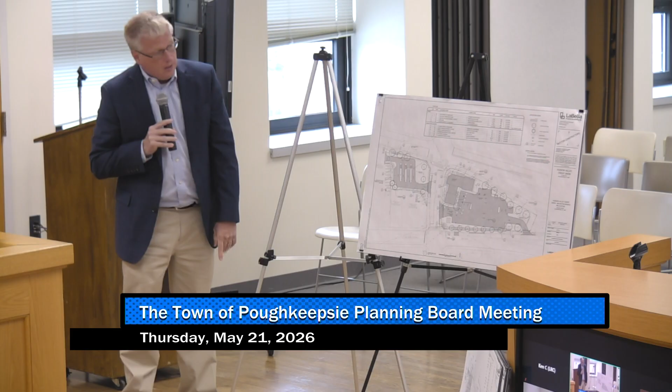That is kind of the large overview of where the changes are and where we've been with the plans. Frank, would you mind stepping up here real quick before we turn it over to Mauri, just to go over some of the traffic items as it pertains to that, and then I'll let Brandon from Mauri Architects give an update on the building.

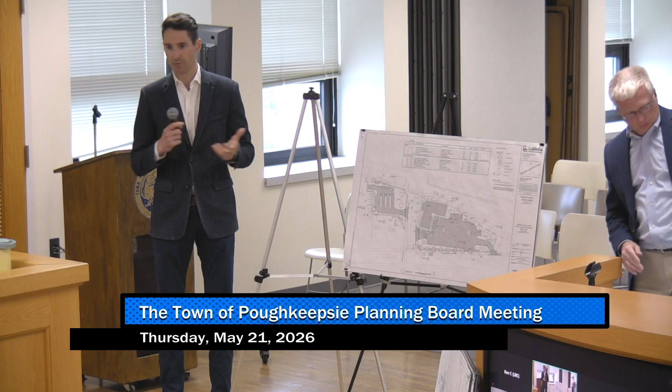Good evening, everyone. Frank Felicciotto with Labella Associates, licensed professional engineer, over 20 years of experience in traffic engineering, transportation planning, and site design. I've been working on this project alongside Roger. First time I'm before you this evening, but what Roger said is accurate.

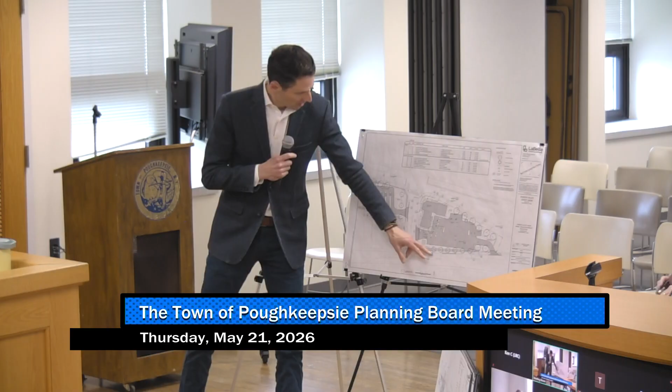We have feedback that came from DOT today. We will not be able to propose a driveway on Route 44. So initially it was a left in and a left out, then it became just a left out, and now it will not be any driveway. Their main reasoning is that they're viewing the leftmost lane as a ramp, and according to their policy, they do not permit driveways on ramps.

The loss of that driveway can be recuperated by a right out onto Fairmount and then a subsequent right onto Main Street. So from a traffic volume perspective, we're not putting the people that would be using that driveway with no place to go. They can make the right and then a right. It's a little bit less convenient, but it's possible and practical.

We've reviewed JMC's recent memorandum. It had a few comments that I believe were going to be very easily addressed. One of the comments that I think is going to take a little bit more work on our end is the comment about the left turns out onto Fairmount.

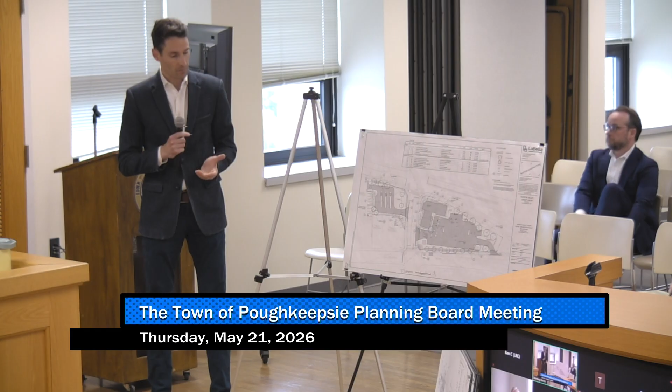Unlike the proposed driveway on 44 that the DOT will not permit, not having a left out onto Fairmount leaves people trying to get back into Arlington towards Vassar with no other option except a circuitous movement—either a right turn followed by a left turn onto Main Street and then some sort of double-backing to get down to Fairmount. The left out onto Fairmount is really the most direct and simplest way to achieve that movement. Without that turn, it's not possible to directly get there.

We've improved the driveway location from where it is now—it's an existing condition, as you know. We've looked at sight distance; there's adequate stopping sight distance for that movement. We're talking about approximately 7 to 8 left turn movements in the worst case peak hour, so it's not a significant amount of traffic because it's just the traffic heading back southbound on Fairmount. But it is an important movement to capture that neighborhood activity that needs to get back in that direction.

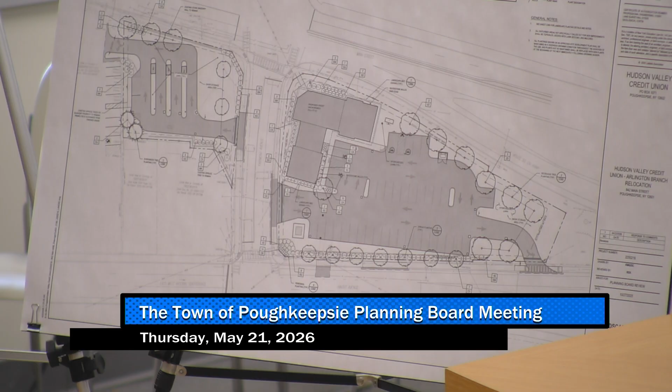So we're prepared to provide a formal response back to JMC with further justification for that movement in the coming days. But our position is, we're able to lose that driveway on 44—we have a plan for that with the redundancy that a right and another right provides. But unfortunately, having to give up lefts out onto Fairmount leaves this site with very, very little access, and already it's a difficult site from an access standpoint. So that's something we believe we can work through, and we'll be providing that documentation in the coming days.

Anything else in particular, Roger, that you had on your mind? No, I think that's great. Okay, and we can let Brandon just do a quick update on the building, and then we can open it back up to the board for feedback.

Thank you. I think Brandon's going to use some technology, whereas I'm still a little old school, so I'll turn it over to you. Here you go—actually, you know what, I'm going to use this. You mind if I use this so I can operate the mouse? Good evening, Brandon Petrella with Mauri Architects. I'm just going to share my screen.

Okay. Is that up for everybody? Appears like it is. Yeah, okay.

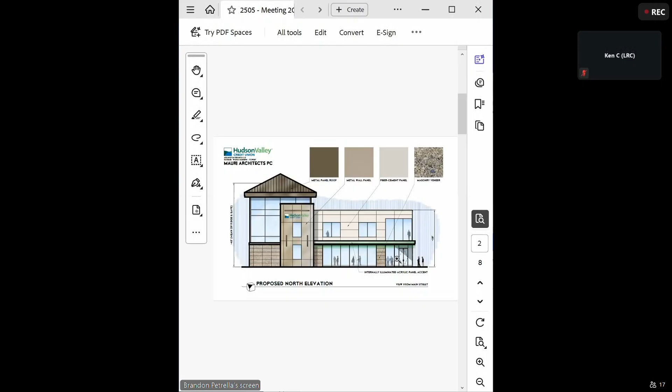We turn the corner at Fairmont, which would be our next slide. The materiality continues through, and now we have sort of an emphasis on the corner of Fairmont and Main.

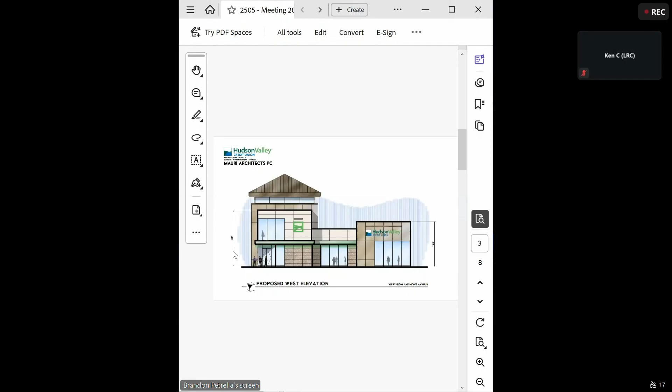As we continue downward towards Haight Avenue, we're transitioning from a two-story building down to sort of a one-story building with an accent at the very end. There's some accent metal panels at that location—the corner of the arterial Haight and Fairmont. We're accentuating that corner by popping up the roof just a tiny bit, but we're still maintaining the large glass spans so we have those views into the retail banking spaces.

As we turn that corner, this elevation is a little misleading because you're seeing a lot of the two-story in the background. It seems a lot more present, but really what you're going to get is a little more of that one-story at that corner, and it's all set back a little bit—that's all purposeful for this one story.

It's because as you move further down Fairmont towards Haight, it becomes a little more residential, so we're bringing the scale of the building down as we progress towards that side of the site. Materiality continues, but a lot of this two-story you're seeing is far back—that's out by Main Street.

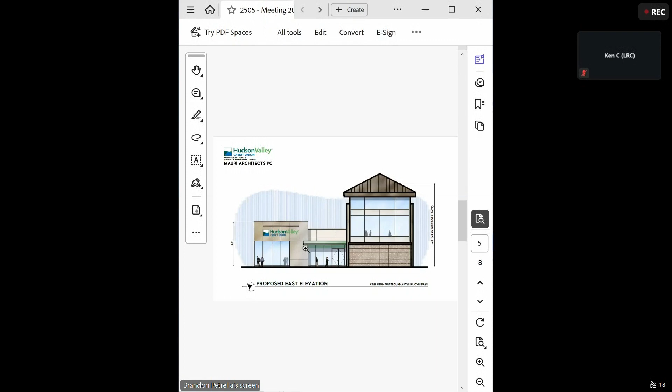Finally, what you're looking at is the parking area, or if you were coming from the overpass looking straight back, the most prominent feature here would be the two-story tower. We have a clerestory space in that as well—there's a multi-purpose room in that space, so we're using that high ceiling and volume purposely. You're also seeing the entrance there, again the green accent canopy tucked inside the inside corner, and that's to the rear.

Finally, I just want to go back—this is the entrance to the town center. We're starting to get into town, coming down 44 under the overpass, and this is our existing view. The buildings aren't up against the streetscape like they are further into the town center—they're set back a little, they're two-story. What this building's going to do is emphasize the entrance to Poughkeepsie with that tower.

That tower is going to be up against the road front. The credit union was kind of born in Poughkeepsie as part of IBM, and I think it's fitting that it can help define coming into Poughkeepsie proper with this building. I think the features of the building are moving the architecture and the business itself forward with the ITMs, but at the same time it's calling homage to all the materials you guys are familiar with from every credit union in Poughkeepsie.

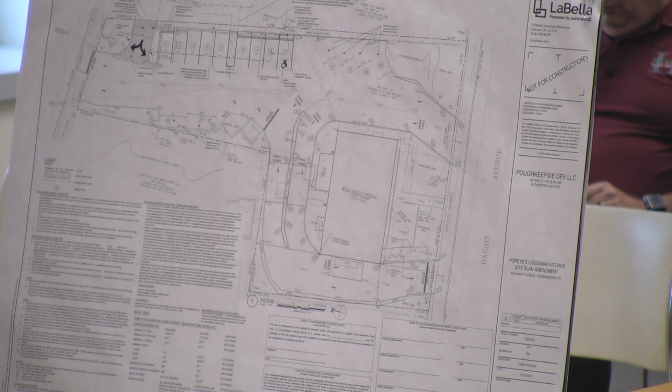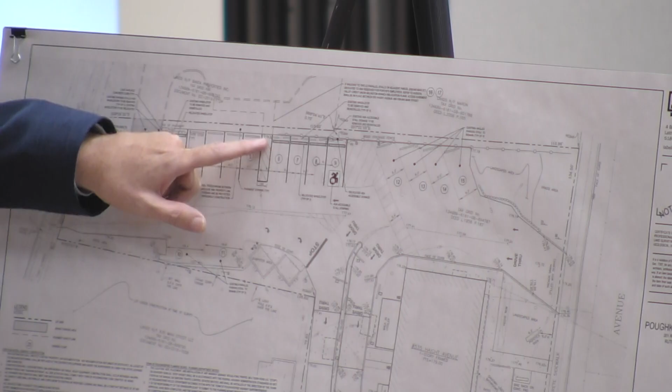That's since been reversed, so essentially the change in the site plan remains the same, just that we spun the direction. The two parking spaces right up here where this access is, the credit union is going to provide those on their property with a maintenance access agreement and parking agreement between the two. We've restriped these parking spaces and provided a sidewalk on the credit union site to bring those people over to this side. That is really the limit of the site plan changes from last time.

Instead of the arrows going in, they've turned to come out. The balance of the site plan remains the same. So that's all I have on this one.

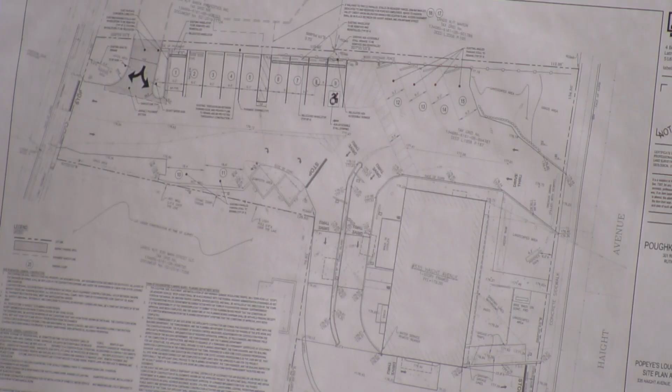Thank you, Kristen. It is on for a public hearing this evening, the first public hearing. It is on for SEQR review, for an unlisted action subject to coordinated review. Again, planning board declared their intent to serve as lead agency in December. No objections have been received. It is on for an amended site plan review.

My comments are pretty minimal on this particular application, but as it relates to the Hudson Valley Credit Union application and the ITM parcel, the traffic engineer and I were talking about the egress, and the Arlington Fire Department also, given their frequent trips on Main Street—Popeyes is a busy restaurant with a dual drive-through, and both are heavily used. Some of the traffic proposed to exit the ITM parcel has the option to go south to Haight or north to Main Street. The traffic going south through the parcel has to queue behind those in the drive-through, so we wanted to take a closer look at that. That's just another conversation to have between the applicant and staff.

And it is on for public hearing. Staff are recommending that you open the public hearing, adjourn the public hearing, and defer action with comments. Again, happy to facilitate any meetings as necessary.

Okay, thank you. Andy, engineering, did you have anything? Yeah, we really don't have much. We're just asking for the easement agreement for the use of the access.

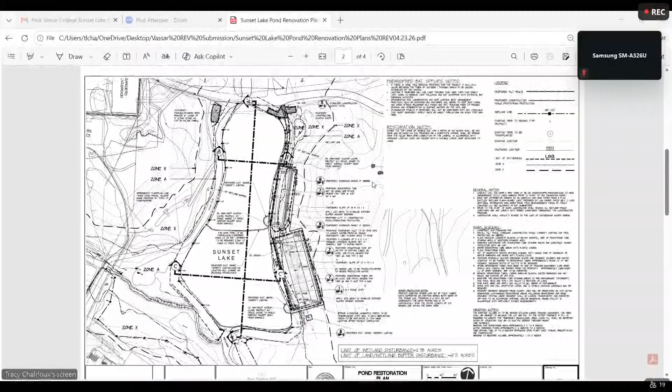And we did receive comments from various town departments, and those have been addressed. We've been trying to keep up to date with all of those comments.

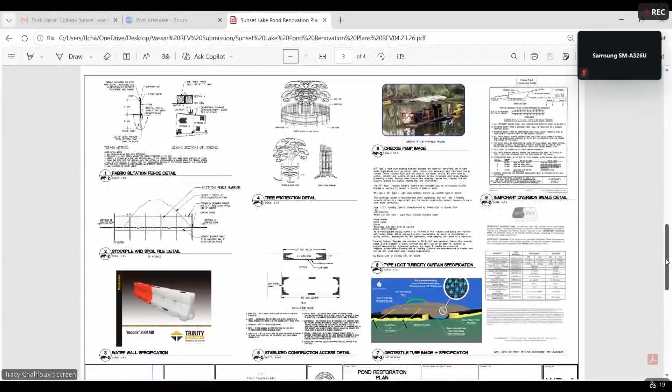There are sediment and erosion control details shown in this set, and also pond dredging sections shown, cross-sections taken from 3 different locations of the pond.

There's approximately 2 feet of sediment within the pond to be removed, and the intention is just to restore it to its original depth. So we're not deepening it, we're just going back to what it was essentially.

I'd like to emphasize that any disturbance is temporary. So after those dewatering tubes have been removed, the hillside would be regraded to the pre-construction topography, and it would be seeded again as lawn.

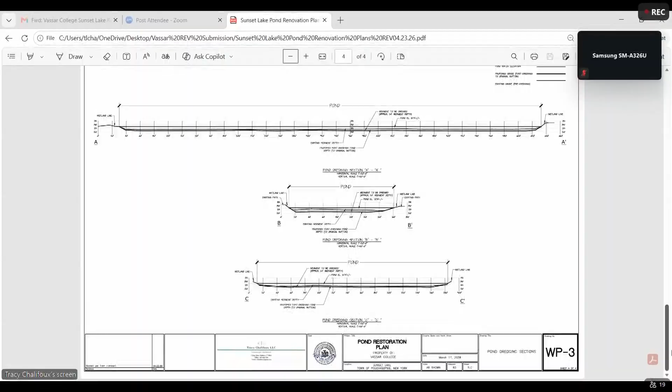I'm happy to answer any of your questions, make any clarifications, or if you'd like to learn a little bit more about hydraulic method dredging, Mark is your person to direct those questions to. Thank you. Eric? Sure.

The application's on tonight for a public hearing, also for the SEQRA environmental review, a major land contour permit, and aquatic resource permit.

They were on last time. There was a lot of information provided in response to questions. Thank you for the thoroughness of those responses. Appreciate it.

Tonight, the board has a recommendation in front of it. We've recommended public hearing and a negative declaration for SEQRA, and a conditional approval, if you think that it's ready.

Probably the largest issue for this might have been the wetland permits that are required. I'll let the wetland consultant go into details, but basically the town's aquatic resource permit in this case is making use of the Army Corps permit and the New York State freshwater wetlands materials for the town's application, as permitted by the code. It seems to meet all of the requirements for those.

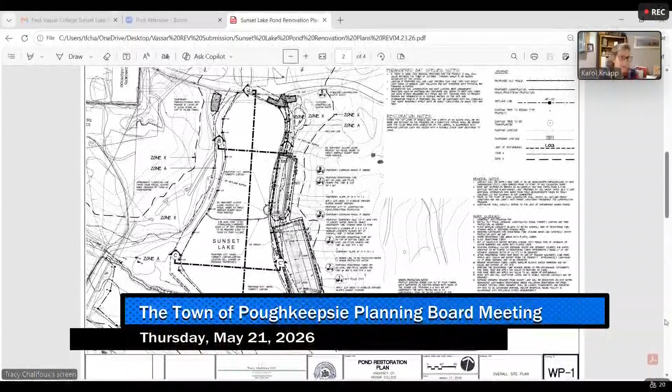The federal permit, nationwide 27, this project - it's for natural aquatic resource restoration enhancement. This activity is planned, designed, and implemented, should be implemented fully to align with that permit. They're using the previous conditions as their reference, and it will result in a net increase in aquatic functions and services. So that permit should be issued.

There's a time compliance the Army Corps is supposed to comply with. We haven't had luck with that, but since it complies with the nationwide permit, we feel comfortable with just having the applicant contact them and provide the contact information to us and grant a conditional permit.

As far as the DEC, there was a letter of positive jurisdiction from the DEC. It had indicated that because of an unusual importance criteria, meaning within the floodplain, and that there were previously mapped wetlands in proximity to the parcel, therefore they had to comply with the DEC regulations, the new ones.

As of last week, the DEC's guidance is now - if you got a positive jurisdiction, they're saying you need to get a redetermination, a reassessment of jurisdictional determination.

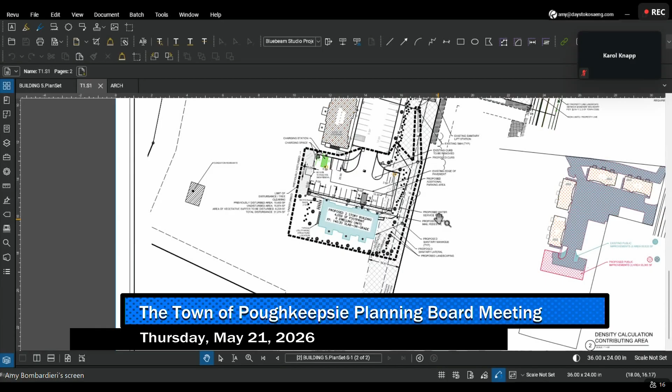Hang on one second. It looks significantly closer. So the house, to the property line, it's 52.81 feet, and the houses are closer to 9D, so they probably have at least 50 to 75 feet behind the houses, which face 9D.

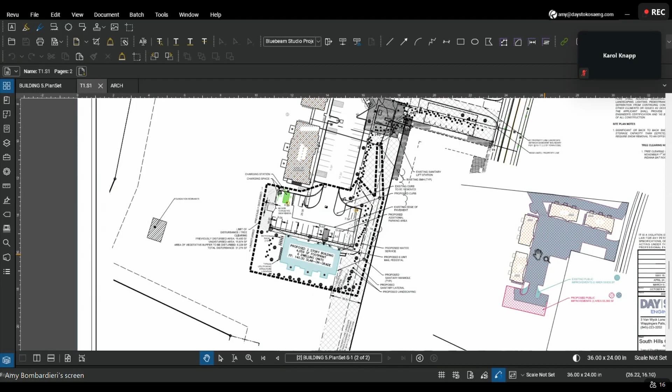And then the only variance they need is for density. That's the one I've been focused on, because it works hand in hand with the site plan. So they're proposing sidewalks, so that factors into the calculation, things like that, any other improvements.

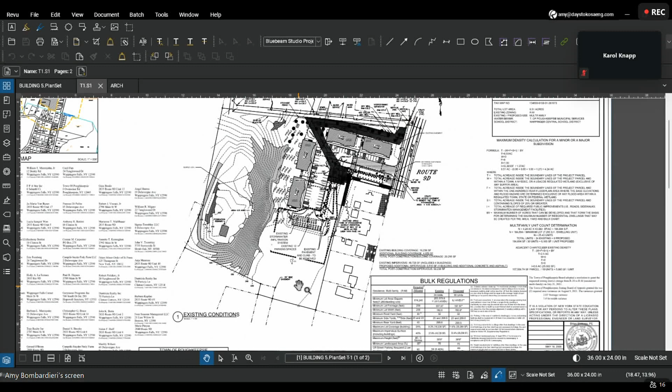I think there's a side yard setback, potentially. Is it 100 feet? There's the 50-foot vegetative buffer. Yep, so according to the zoning administrator, there's the density variance, there's a variance needed for the buffer, and that seems to be it.

So in the buffer, the structure's not going in the buffer. It's the parking area that extends into the buffer. The structure's outside of the 50-foot vegetative buffer, and a substantial number of trees were planted in that area, and a substantial number will be planted as a result of this new building.

Thank you. Sure. Steve? No comment. Sharon? None. Rocco? Yeah, I've got a quick comment.

The capacity of the refuse bins, I know you're adding another building here, do you have the capacity there? Because the reason I ask is I lived in a condo where that was a real serious problem, and the garbage was put outside of the refuse bins. And so it's also kind of far away from this new building.

So they have not had any kind of problem with refuse with the four buildings there. There is room inside the existing refuse enclosure to add another container, and if they need to, they can increase pickups. Yeah, in most cases it would just increase the pickups. I live in an apartment complex now where 24 units use one refuse enclosure, pretty much the same size, and we get picked up like twice a week, so.

Okay, is that the pickup schedule here, twice? I don't know, should I call? They don't, I think they're just getting one pickup a week, but initially I had proposed a secondary refuse enclosure closer to the new building, and the consensus was that Royal, or whoever they use as a commercial hauler, would not want to do two pickups at one location.

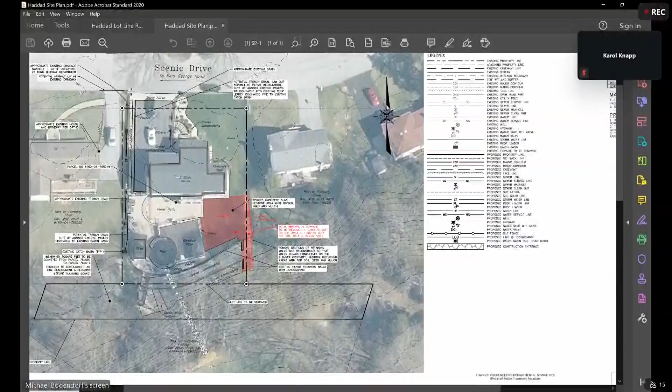This is a new application for lot line revision and for a major land contour permit. There is no site plan on this application, and also for SEQR environmental review.

We've provided our comments. We're recommending at this time — initially we provided alternate recommendations, but given recent events and information, some of which has been forwarded to the planning board, we're actually recommending that it be deferred. There's also a SEQR classification issue. We believe it's an unlisted action, and since it began with the zoning board, we're recommending an uncoordinated review so that the planning board can act and continue to interact with the zoning board as they go.

You have our comments, there's a few things involved. Mostly we thought it needs additional information on the plans to meet the criteria for land contour. The lot line is in pretty good shape. For the land contour, in particular, recent correspondence from May 15th from the applicant noted that there's a stormwater plan in progress. Since that's a significant part of the review, we really think that stormwater plan needs to be provided for the engineer's review before the planning board has information to act upon. Okay, that's pretty much it.

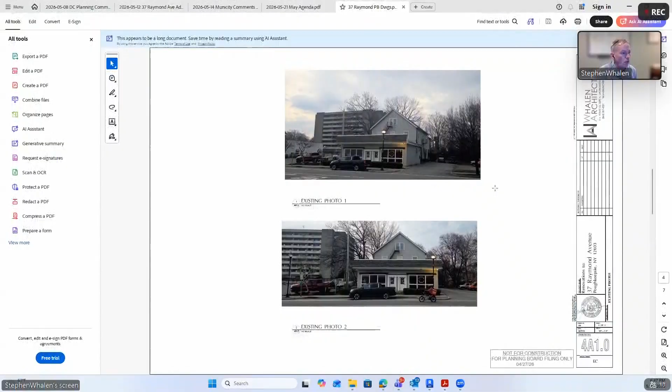Yep, so everybody can see my screen? Yes, we can. Okay, so good evening everyone. I'm Steve Whalen of Whalen Architecture, representing the owners for 37 Raymond. The proposal before you tonight is to renovate and add on to the existing building at 37 Raymond and make some site improvements. The pictures before you now show the existing building as it is right now. The building currently has two retail units and 4 apartment units. Our proposal is to renovate the building, add on to it, and match similarly to the design of the Arlington, located at 21 Raymond Avenue. We're also proposing to renovate part of the site to include 11 parking spaces. Any of these improvements to the site will be done with pervious pavers. We were also in receipt of comments from the Dutchess County Department of Planning and Development, the Poughkeepsie Planning Department, and the consultant and fire district comments.

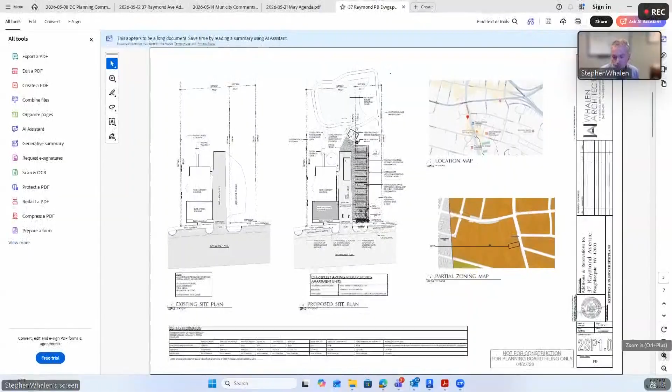Eric? Sure. So Steve introduced it, it's an application for special use permit and site plan and architectural review, subject to SEQRA review also - it's a SEQRA unlisted action. We've provided a bunch of preliminary comments. It's a good start, we see what the applicant is doing, it seems like a reasonable proposal. We do need quite a bit more information on the plans, that's covered by our comments. We're recommending the planning board discuss the application, including the architecture, to give them some ideas on your preferences for next time. There are a number of... yeah, I think that's pretty much it. Oh, I did get a call earlier - the applicant did confirm that their intent is to merge the lots. So they did confirm that. And have a discussion, and then we're recommending that the board defer it.

Okay, great. Andy? Sure, yeah. Like Eric said, we're really looking for some additional details, comments on ADA access and grading, a little more detail to make sure that complies. And with respect to grading, we need to see the grading in the back, particularly related to the stormwater retention pond proposed on the adjacent parcel that's got an easement for this one. I believe that grading is going to cut into the number of parking spaces that can be provided, so we'll need to see that. And then as far as the dumpster enclosure, I'll leave it to the board, but the board may want to consider requesting some sort of turnaround for that refuse enclosure and the truck, because having the truck back out on Raymond Avenue probably could be a concern.

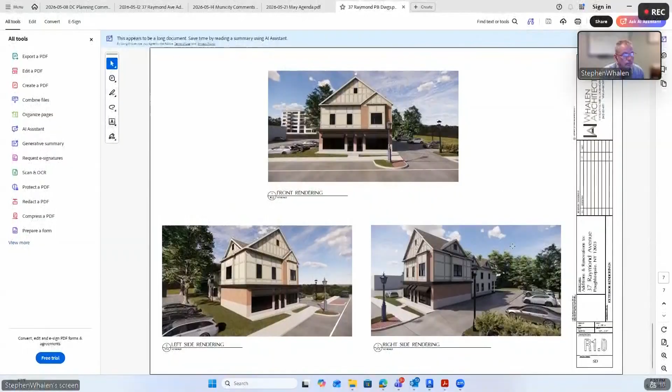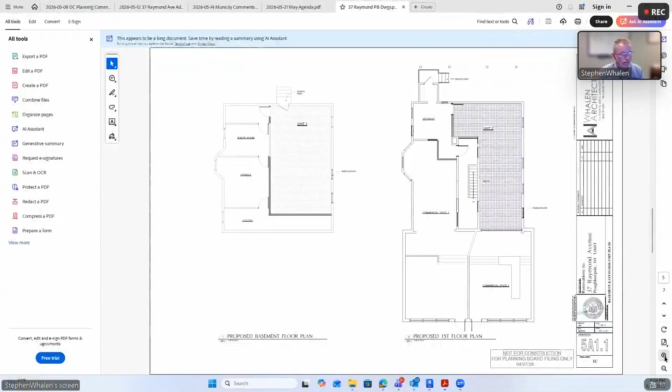Sheet 5A1.1, on the left-hand side, the proposed basement floor plan. How will you access the boiler room and storage utilities without going through Unit 1? I assume you have to complete that. Yeah, these are just simple layout plans, just showing where the units are going to be in the building. So we could certainly provide a vestibule, which would go either into Unit 1 or into the boiler room, the storage, and then the utility closet. Right, well, I assumed it was just, you didn't have time to put it in, but I assumed that we're not going through Unit 1 to get to those other areas. Yeah, once these plans are developed, that will not be the case, to get access it will not be through Unit 1. That's correct. Okay, two more quick ones.

With the additional units, I assume you're going to have additional HVAC, and where would that be located? And will it be hidden?

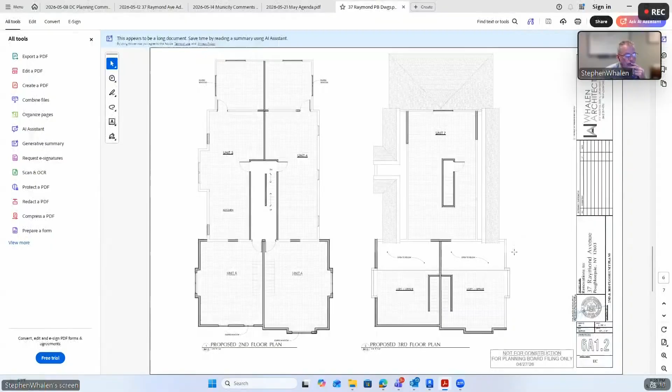Yes, we do have to look at what type of HVAC system we will be providing for the building, but yes, it will be hidden. Location to be determined. Okay, so that's a future thing.

Okay, that's what I got. Yep. Thank you. Peter?

This is a great example of adaptive reuse. I took a course in historic preservation, and what they've done here is created really an historic building with the gables, the windows, split timbers. I mean, it's really, I think, something that the neighborhood is looking for. It's going to be a real plus.

Okay, thank you. Robert? Nothing. Nothing? And I have nothing else to add at this time.

Okay, let's see, I move that the planning board determine that it will conduct an uncoordinated environmental review of the proposed project as an unlisted action. Second. Moved and seconded, called the question, all in favor? Aye. 7-0.

I move that the planning board defer action on this application and direct the applicant to respond in writing to comments of the planning board and those received from town departments and agencies, including but not limited to the following, 1 through 11. Second. Moved and seconded, call the question, all in favor? Aye. 7-0. Okay, thank you so much, we will see you in July.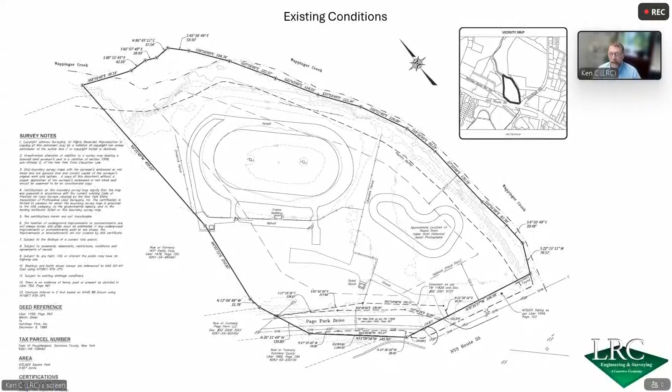But the owner and operator is looking to bring back the track to have that there. So we've proposed a new road course with a connection to the existing oval course. Through that process, we did learn that some of the structures on the site, primarily sheds, never really got building permits obtained for them. So as part of this action and this application, we're going to rectify all that so that we have a valid site plan and everything up to speed for the existing buildings that are there.

The current operations typically have between 20 and 30 racers on their regular racing days. These tracks will not operate independently, so there'll either be an oval race or a road course race. It'll be only one at a time. You wouldn't run two races at the same time here.

There is no fuel storage. All the carts, there's a kart series, and I have some pictures at the end to give an example of what type of carts are here. They're all considered the kart series of vehicles. You're required to bring your own fuel in and your own fuel out. Anything you do is by the applicant. There is no sales, no storage, no bulk storage of fluids or anything like that here at the facility.

They do have some main events, some larger events that bring more racers. Typically these come with trailers, and because they're so small, a lot of these racers have 2 or 3 carts per trailer. The primary people that watch these races are families, either coming with them or a few people around them, grandparents, that type of thing. It does involve a lot of youth racing, but it also has adult racing as well.

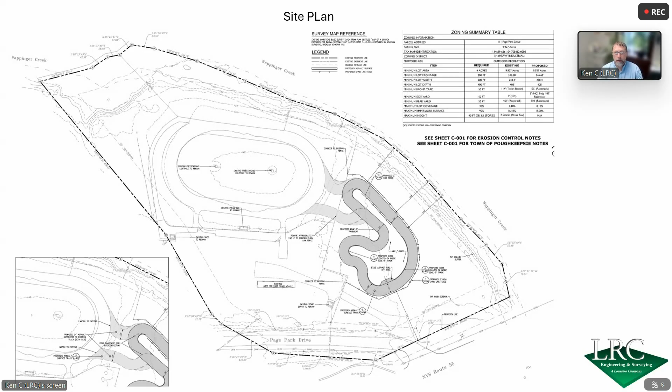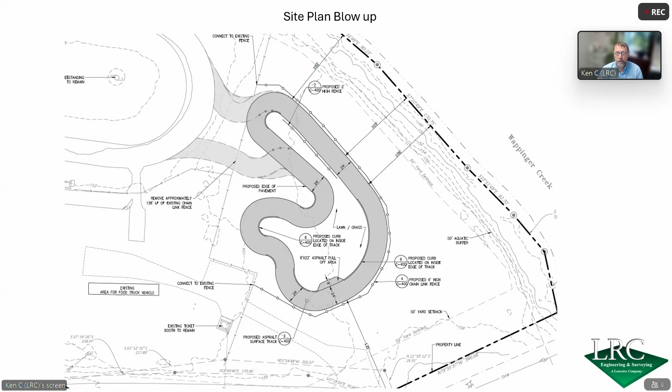Proposed asphalt area is an addition to the existing oval track. It comprises just under an acre of disturbance. There's really zero grading proposed; it's going to follow the existing contours that are there. The only grading is at the connection to the oval track. You see there's a couple of close contours, it does rise up a little bit that we have to move out because that would be too dangerous to go up and down at that angle there. So we do have that little bit of grading in there. Otherwise, it's primarily just removal of the topsoil and placement of subgrade for the track itself.

There is a floodplain and floodway. We are working with a floodplain consultant to understand some of the elevations, but the floodway extends just past the area of work, so no work is proposed in the floodway, but there is work proposed in the floodplain.

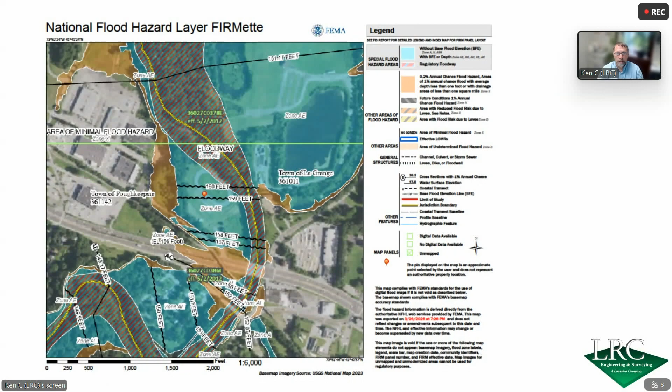We did receive comments from staff and from the consultants. We are working on trying to make sure that all of the existing and proposed items will work with the floodplain itself. So we have to make sure we have some electrical upgrades to do to the structures, and as I talk through that, I'll explain a little of that.

The starter station, I had referred to it on the plans as a press box, but really it is a starter station. It was historically in this location. It was put up by the former owner, but it essentially is just for employees only. There's no bleacher set up. There's nothing here like that. It is just for the starter stands in the box.

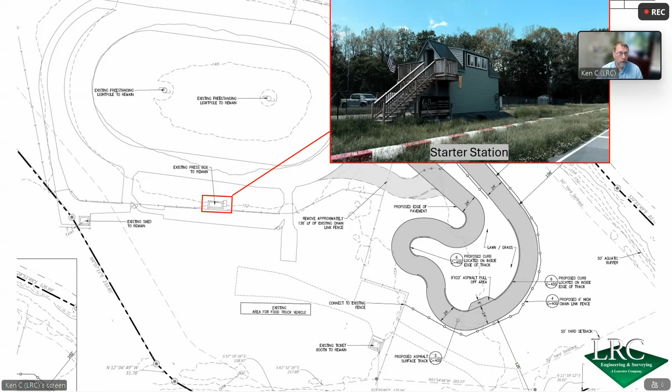You have an EMT that looks out one of the windows. You have the race officials in the other 2 windows, just keeping an eye on the track itself. There are speakers here, 2 on the post over here and on the post behind me, on both of these light poles. Those speakers are not for announcements during the race. They are announcements of who's up next, so to speak, because otherwise the drivers wouldn't know when their division is called. That's all it's used for.

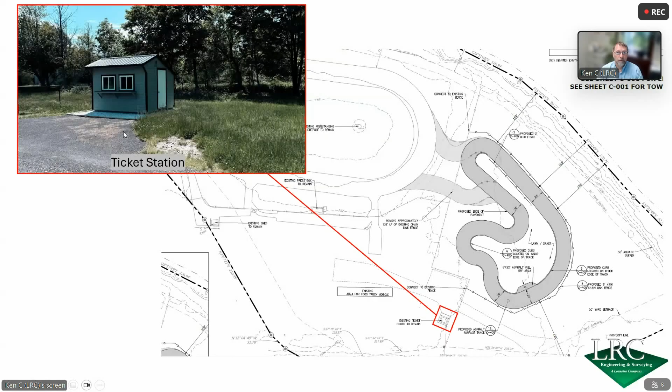The second structure over here is a ticket booth. It is a dry storage shed that currently is just where, when you come in, you buy your tickets. That's all it is. It was just upgraded from a lean-to structure there.

The third structure is a weigh station. It holds the scales for the track, because the cars get weighed afterward to confirm they are within tolerance of the actual track itself.

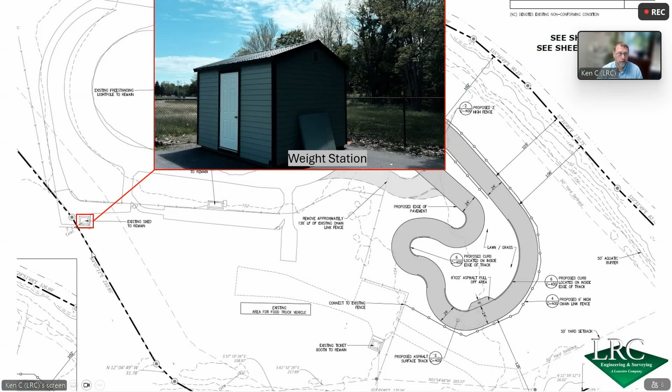As you note in here, we do see there has been and is an encroachment over the property line to the neighboring property from some of the asphalt. As part of the proposal, we are going to remove that asphalt and just pull it back to our property line. We don't need that area. It was just there.

And lastly, just an idea of the type of carts that are here, from the younger kids to a little bigger kids. They have a body on them, but they are still considered carts. They have small wheels and small cycle motors in all of them. And that was my quick version through it, because I know we have a lot of things on the agenda. So, okay, thank you. Eric?

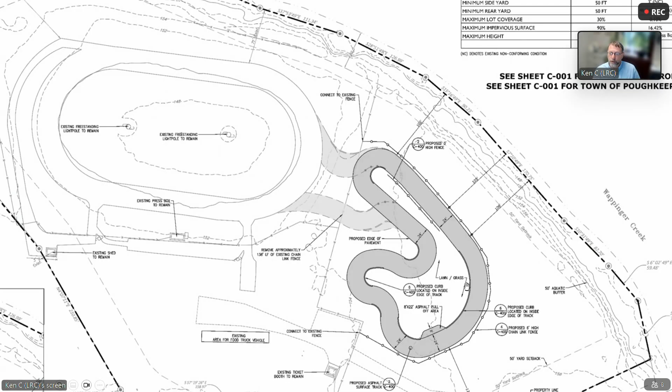The road course has a connection here, and it can operate as a smaller road course for certain particular kart sizes, or as a larger road course connected to the existing course over here as a full road course. That's the only difference in the pavement—these sections may not be in use at all times, only when they're doing the full course around both the oval track and the course here. So there's no difference in the pavement section itself then?

Nope, not at all. One thing that isn't shown here, which came out of that discussion, is we're putting in a small starter stand—just a pedestal-like deck in this area—so that when it's run on the small course, they have an actual starter stand to work off of. We'll add that into the next plans and provide information for it.

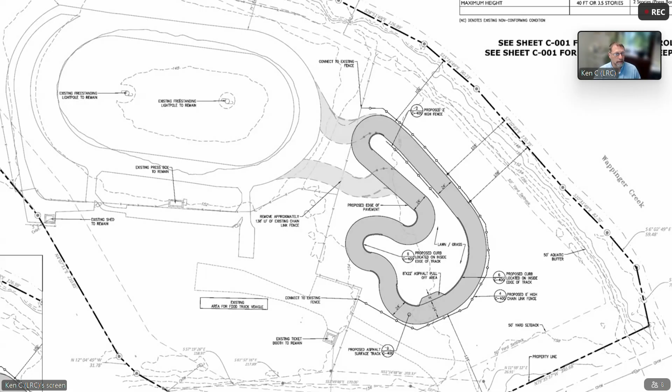Okay, there you go. I had spoken to Eric about this earlier, and thank you, Ken, for a lot of that information, which we didn't know beforehand—we didn't know if these were gas or electric, if you're not familiar with the existing course. But there are a number of issues that aren't likely significant, but with a full EAF they'll get addressed. There are several endangered species listed on the mapper, archaeological sites, wetlands, floodplain remediation sites. Having the full form with an explanation of all that should take care of it, but right now we need that for the record—so thank you for the explanation, but let's get a little more down on paper for the record.

No problem at all, thank you. Also, as far as the floodplain, we did request for the adjacent parking lot area they were going to use for equipment storage—we required some things from them because of the floodplain. Basically, are you moving equipment out in advance if there's a known flood coming? That's probably the same with this. You said they're anchoring them down, but otherwise, if there's typically a couple days' notice before significant flooding, some kind of contingency plan to move things out if need be.

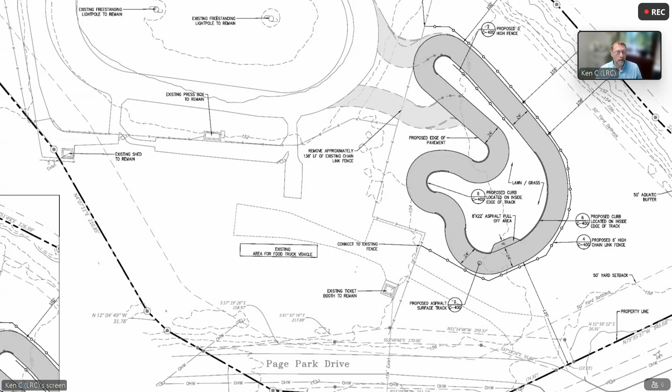One of the things we are going to add through discussions with the applicant is a fence out by the road, a little closer to the entrance to the whole facility. Because historically, a lot of people have come in here and just parked to go down in the stream, to go fishing, to do other things, and they want to try to eliminate that with the new owner. It doesn't want people on the property for that. Thank you.

Can I ask another question? Ken, I got a quick one for you. How close is this to the rail trail?

It's a quick one, but I don't know the exact dimension. Well, the concern is if you said it's between 3 and 9 - do they run the races from 3pm to 9pm? No, they open at noon, and the latest they'll go is 9 o'clock. Okay, and will they be going over the rail trail to access the site?

It looks like they do, if I'm not mistaken. They do not. Oh, okay, nope, they do not, all right, it's raised there. Okay, great, thank you.

To answer your question, the rail trail is about 360 feet to the track. I was more concerned about the vehicles going over the rail trail, because I've been through there on the rail trail. Okay.

I move that the planning board determine that it will conduct an uncoordinated environmental review of the proposed project as an unlisted action. Second. Moved and seconded, call the question, all in favor? Aye. 7-0. I move that the planning board defer action on this application and direct the applicant to respond in

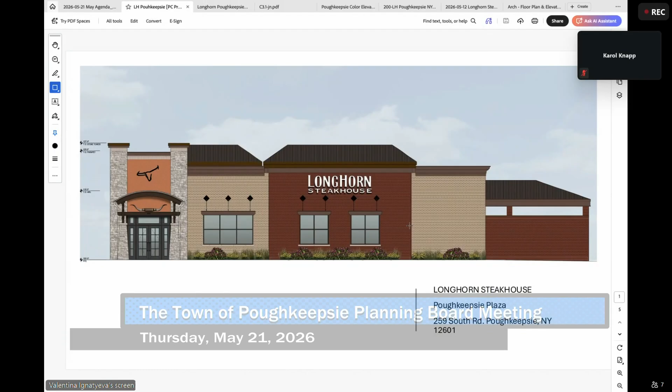Just a quick overview presentation of what we're proposing. This is a Longhorn Steakhouse that'll be converting a previous TGI Fridays in Poughkeepsie Plaza, right off of Route 9. The building footprint is staying the same. We are doing an interior remodel for our concept, but also updating the elevations and doing some very minor updates to the site by changing some of the landscaping, removing the existing patio and replacing it with landscaping, and also adding, per the pre-development meeting we had a couple weeks ago, a concrete pad for the fire department to better access the FDC.

So with that, I took some pictures fresh this morning. This is the south elevation of the existing building and what we're proposing. Like I said, it's pretty minimal in terms of change, just a bit of a facelift and alignment with our concept. We're keeping the brick, it's just getting painted per our brand colors. Obviously changing the windows and the awnings, but this is pretty much just a quick visual of what is being proposed on the south side.

This is the west side facing Route 9. And then we have the north elevation and the east elevation with the dumpster enclosure, where we're also changing or redoing the dumpster pad apron, just because per our geotech it's in pretty bad shape, so we just need to reinforce it and redo it.

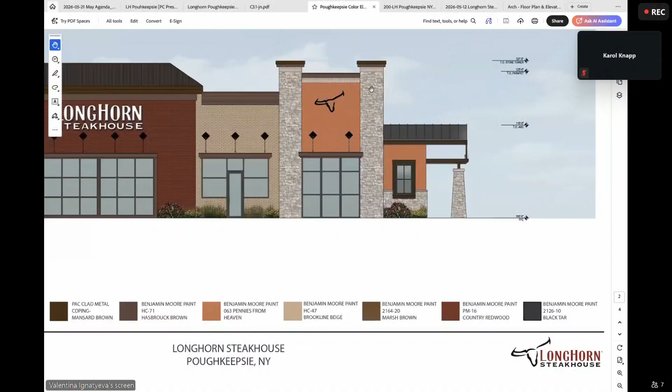So the color elevations that were previously provided have the information on the paint colors and the materials that are going to be used. But most of the facade we're retaining the existing brick, we're just painting it. There's going to be some faux stone siding on the columns, some EIFS on the tower, and I believe we're also going to be painting the roof to match our concept.

Does anyone have any questions? Yeah, I got a comment. Can you put up the elevation of the front of the building? Just one second.

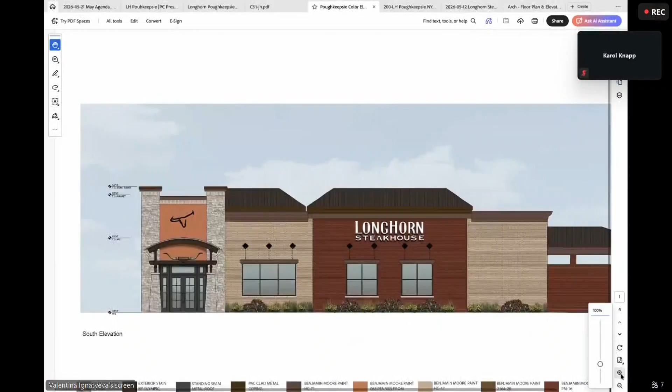So if I'm not mistaken, on the TGIF building there were no columns where the entrance is proposed. There weren't. They have this, and I believe honestly it looks like plywood. So you have to build those columns? Yes, we're gonna have to build those out.

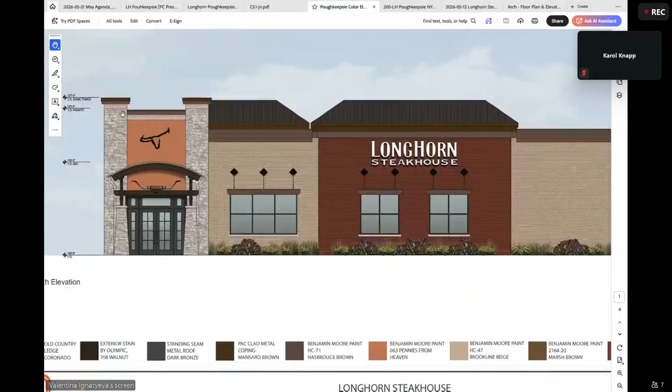Can you raise it again? Because it looks like you have to change the configuration of the roof there as well. Are you going to take away that roof line? I'm trying to remember, because I think a lot of it is not actually structural. Oh, this one, yeah.

So we're gonna probably flatten that, so that'll be a flat roof. There's no way to make it match the rest of the building, I guess?

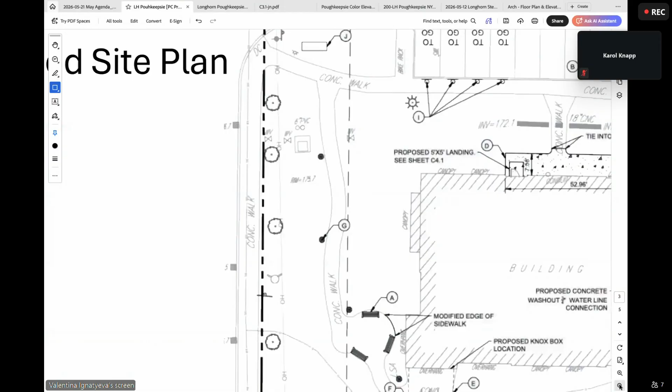The columns are gonna go past the parapet there, so that kind of also creates a little bit of differentiation to avoid having just a fully flat roof on the tower.

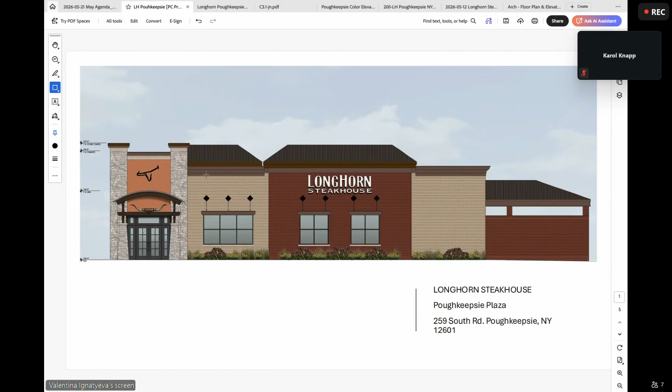So if you do the north elevation, what will that look like? I believe the main entrance is the south elevation. If you wanted to look at the left side, that would be the west south elevation. So the next view to the left would be west. Here's a better view of it, that's the view from Route 9.

There's still gonna be a lot of differentiation on the roof line. So there'll be columns on both the front and back? Correct. And then also to the right on the west?

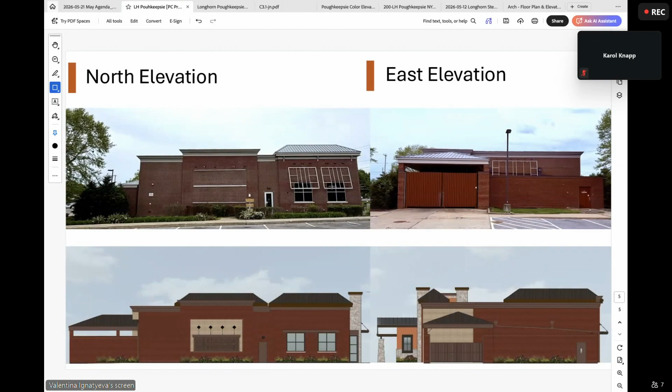The west elevation looked like there were columns also. Yeah, there's gonna be columns on both. So on four corners there's gonna be columns? Yes, and they have to be constructed on three. Okay, all right.

You'll see what all the materials are and stuff. What about exhaust or rooftop mechanicals? Was there anything in the plan about that? I can confirm they're not gonna be visible. I think the lowest parapet is already almost a foot higher than our highest RTU. So they're gonna be well hidden. We'll just need to see that in the final plan set. Absolutely, great.

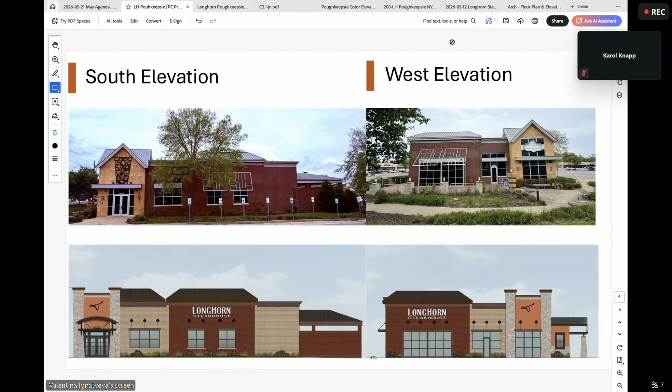Michael, you had a question? It was related to the flat roof, already covered it. Did anyone else have any questions?

Looks good. All right, I move that we accept architecture as provided. Second. Moved and seconded, called the question, all in favor? Aye. 7-0. Thank you so much.

Thank you so much, I appreciate it. Safe trip back to Brooklyn. That's fine, take the train.

Next up, Central Hudson, SK. We gotta open the floor for any comments, right? Any public comment on anything remaining on the agenda? Not from those guys, anyone in the audience or on Zoom? All right, so I move that we close the public comment. Second. Moved and seconded, called the question, all in favor? Aye. 7-0. Okay, Central Hudson SK transmission line replacement, SEQR review, site plan review, and aquatic resource permit review.

Good evening, my name's Anthony Mirando. I'm an attorney with Cuddy and Feder. I'm here with Central Hudson Gas and Electric tonight. I'm joined to my right with Kristen Baker from EDR, our engineer, and Jacob Winterman from Central Hudson, our project manager.

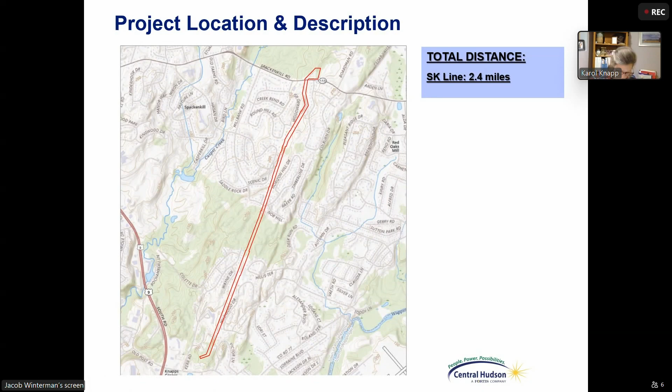Hello everyone, my name is Kristen Baker. I'm a project manager at EDR. We serve as the environmental and permitting consultant as well as the engineer on this project and many others for Central Hudson in the past. For the board, I just wanted to give you a summary of the environmental resources in the area, as you probably saw in our application materials. For rare, threatened, and endangered species, we consulted on both the federal and state level. The federal IPAC system did come back with bat species, but then we got information from the DEC Natural Heritage Program, and they said there were no species in the area, so no adverse impacts on any protected species due to this project from that consultation.

In terms of wetlands, EDR crews went out in the fall last year and performed delineations in the right-of-way, and there were 6 wetlands delineated in the area and 4 perennial streams. There are 2 or 3 poles located in wetlands, and they will remain in the wetlands through the project, so there's no change in the impacts to those resources there. The rest of the delineated resources will be protected through matting or full avoidance, as shown on the plan and profiles.

And then lastly, I just wanted to let the board know that 3 hours after we submitted our application, the SHPO, the State Historic Preservation Office, came back with a letter of no adverse impact for the project for cultural and archaeological resources. So we will submit that to the board with our supplemental materials. I think that's it, and I'll hand it back to you, Jacob, to just go over the history of the line.

Appreciate it. All right, so on our next slide here, we have a little bit of the history and the existing conditions of the SK line. Currently, it's a wood pole construction, over 60 years old. After some field inspections, we found some long-term degradation of both the poles and the wire. The overall infrastructure has reached the end of its useful life, and the design currently doesn't meet our electrical standards.

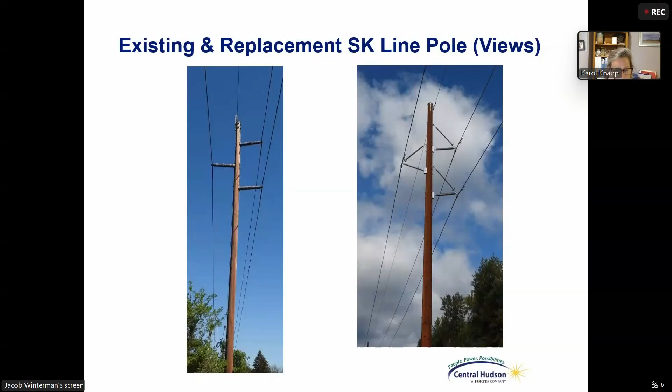Thank you. Kristen? Yeah, great, thank you.

For SEQR purposes, it is an unlisted action, subject to a coordinated review, site plan review, and aquatic resources permit review. The nature of the SEQR environmental part is we're just being tremendously conservative in our environmental review approach. It does cover a lot of areas, so it just seemed like the prudent approach didn't necessarily fit neatly into a Type 2 box, even though it is largely a replacement in kind.

So I think you hit on it pretty well. Just to reiterate, it's 34 pole locations that are existing, plus 2 additional pole locations.

One of my comments that stood out, just because of the nature of the Knapp's Corner substation review - there was a new pole proposed, SK number 3, sited in the utility corridor, which fair enough, but it is adjacent to parcels that I think were historically actively engaged in that public hearing process. So I asked if there's any ability to consider screening if someone came forward. I know Central Hudson has been really good about working with their neighbors on screening in the past.